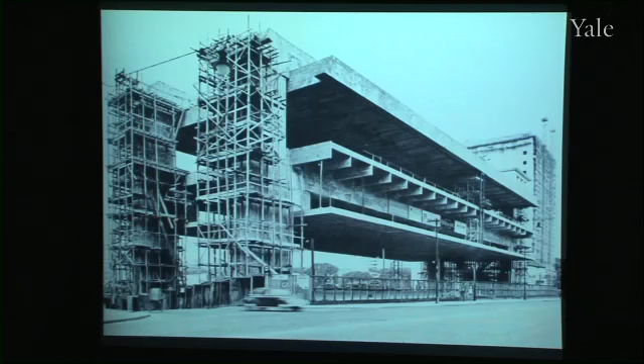But of course we're also interested in defying gravity, in stretching structure and pushing it to its limits. This image of the skeleton of the Lina Bo Bardi Museum of Contemporary Art in Sao Paulo represents this, where she made an 80-meter span, making the structure feel like it's hovering over the city, creating a belvedere, a public space beneath.

Or these bridges—the undercroft of this confluence of two bridges in Toulouse—which somehow describe the sense of presence produced by mass bearing down and being borne up, that ancient sense of moving amidst the play of the forces of gravity. And this drawing, which we love, from Italian Thoughts by the Smithsons, talks about conglomerate ordering and expresses so well the blurring of lines between landscape and building, between object and landscape.

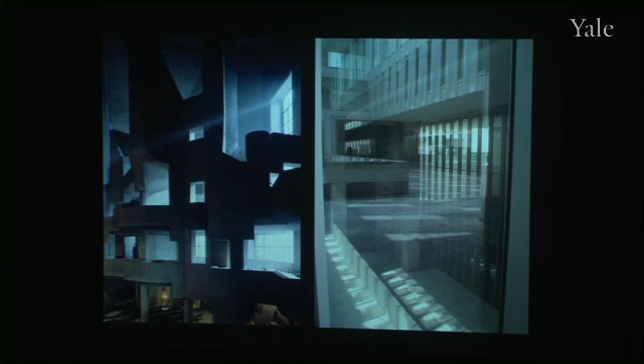We work a lot with surface and the making of layers of surface, always looking for a sense of depth rather than thinness.

In working in cities, this wall in Santiago de Compostela in the rain is an image we often think about. We think about Alvaro Siza's description of this wonderful wall, where he says it's a monotonous and vibrant wall, finishing the square, wavering between nothing and magnetic presence.

I suppose this represents a question we often ask: how much do we as architects need to do? Can we make a good wall? Can we make something mute but beautiful?

Sometimes we need to be in the background, and sometimes we need to make architecture that's in the foreground. Looking at cities, we think about the skin of cities, scale and rhythm.

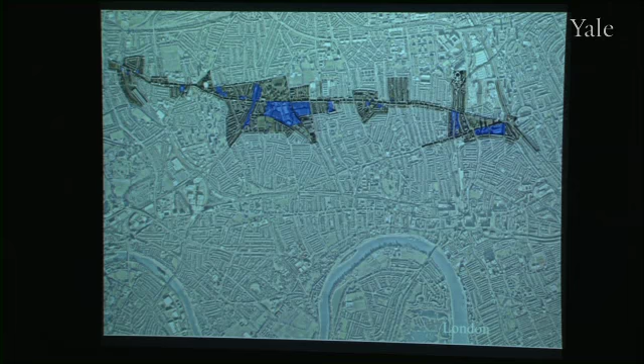These are four maps we made of London, Dublin, Milan, and Toulouse—each one an hour's walk in each of these four cities. These maps were really trying to understand the geography of these cities and the layers and grain of history one moves through in an hour's walk. Understanding a city is so much about measures, scales, rhythm, sound, and silence.

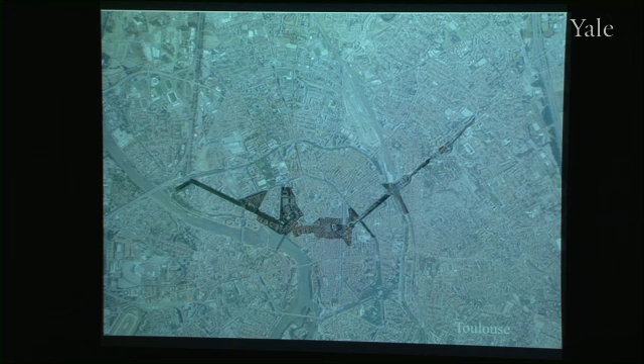Manuel de Solà-Morales talks about the skin of cities, and that we as architects need to give cities the attention of a detective who scrutinizes the tiniest clues in its wrinkles. That's something we enjoy thinking about.

Dublin is the city we've grown in, where we've had our practice for over 30 years. It's a city where we've been stitching and repairing large and small projects. The historic core of Dublin is very much related to the European tradition of streets and squares.

Because of this continuing practice we've been engaged in over the years—stitching and repairing—somehow that's ingrained in our consciousness, irrespective of the kind of problem or set of conditions we're given.

In this competition, which we won with a collaborative group, Group 91, to reinstate an urban quarter in Dublin, the project was very much about addition and not subtraction. That's probably part of our philosophy: to think more about what we can bring, what we can add, and how little—or if nothing—we need to subtract.

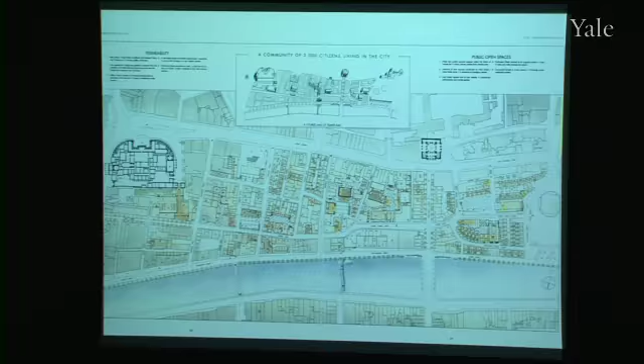We've also been involved in educational buildings at the scale of primary, secondary, and university buildings. This exploratory project aimed to provoke a discussion in the University of Dublin about the role of the humanities in the university. They used us as architects to provoke a debate about what the role of the humanities should be in the context of the role of the sciences, for instance.

And we made this space between a library and an arts building, and made a kind of free space within which anything could happen. We were interested in the idea of the view of the university as a place to which you go to look after and attend to knowledge. That a university is not necessarily about the consumption of knowledge, but that it's a collective endeavor of care where knowledge lives and hopefully flourishes. And so in a sense, we were thinking about a university as a kind of garden.

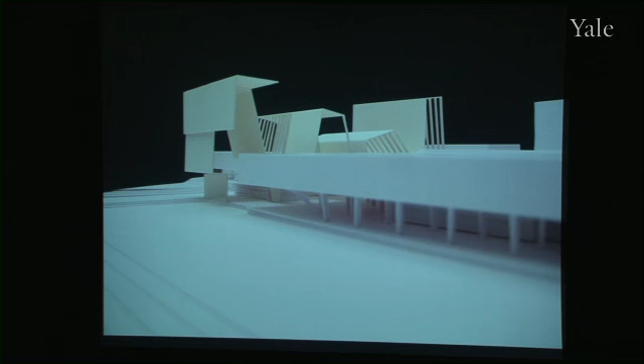And so we made this unreal exploratory project. We just made a series of canopies and light scoops to catch the sun, protect from the wind, and make a kind of space which might be a workspace or a place of public use.

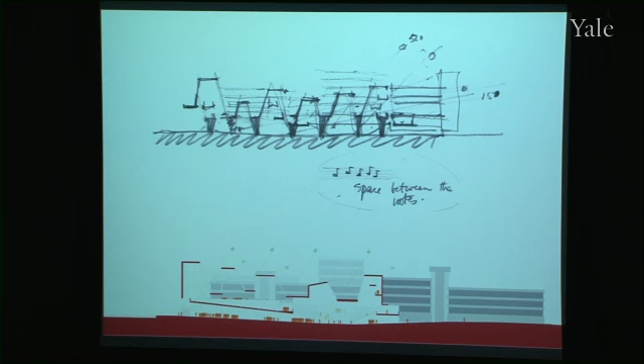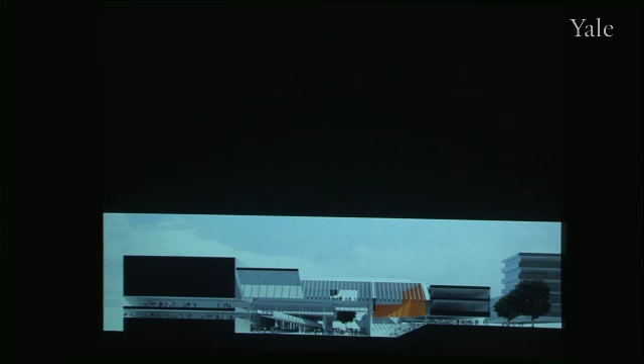And in contrast, we've also been working in a university building in the west of Ireland, in Limerick University, where we're making a medical school and student accommodation. We're not showing this evening, but what we are showing is a house that we did for the president of this university in Limerick. And we're operating here in a campus which is in the middle of the Irish landscape just outside the city of Limerick.

And this image shows the familiar ruined tower houses and castles which sit in the space of the Irish landscape like silent ghosts and actors from the past. And there's something really poignant about the way that these buildings sit hard in the landscape, not really enclosing much territory around them, but somehow sitting hard on the ground and having a sense of presence, both in terms of the immediate surroundings and in terms of the bigger horizon.

And we were working in the North Campus, where there's the loose agricultural field patterns in contrast with the more orthogonal grid of the original part of the university, which occupies the grounds of a classical estate house.

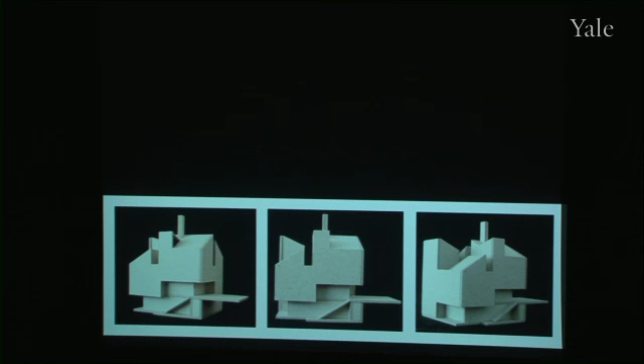And so we were working with the more, let's say, primal Irish tradition of these towers and ruins, and trying to stake out territory in a way which in some way was evocative of these kinds of buildings, carving and sculpting the house to make a sense of vertical stratification, and as I say, to finding a way of sitting the house in the landscape which would be reminiscent of these buildings.

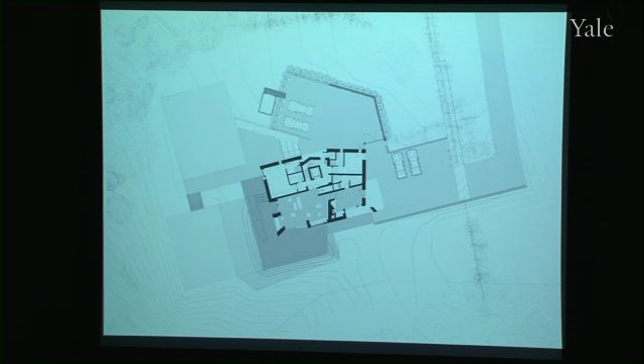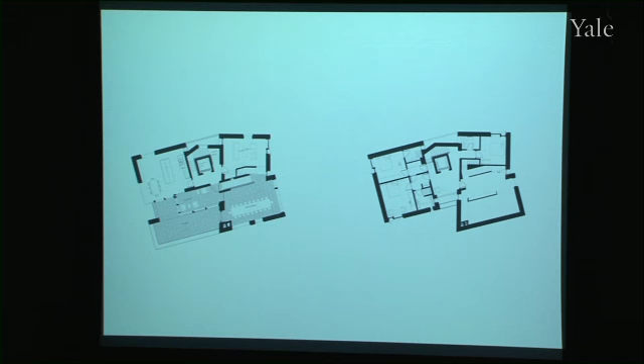It's a 3-story house, very simple, modest kind of project in many ways, family quarters to the north, and the more public functions facing the south over the River Shannon. A loose form which somehow adjusts itself to the surroundings.

And somehow making windows and deep walls which engage with the landscape, both in terms of its immediacy and its bigger horizon, and using traditional techniques of building of lime render, limestone sills, and timber windows, organic materials which adjust and change with the climate.

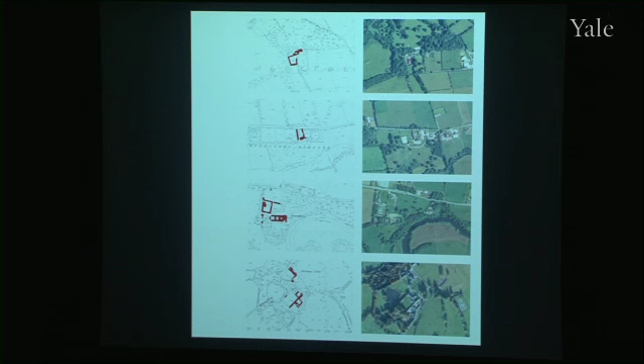And probably in contrast with the more stoic or heroic presence of these towers and castles in Ireland is the tradition of a much more modest way of occupying ground and occupying landscape, where farm buildings and more modest housing somehow merge with the hedgerows and the field patterns and hug the ground for shelter.

And that tradition is one that we've used in the making of schools, where we hug the ground also for shelter and stitch into existing copses of trees and make courtyards for protection and make foreground or entrance spaces which frame the sky and frame the bigger horizon.

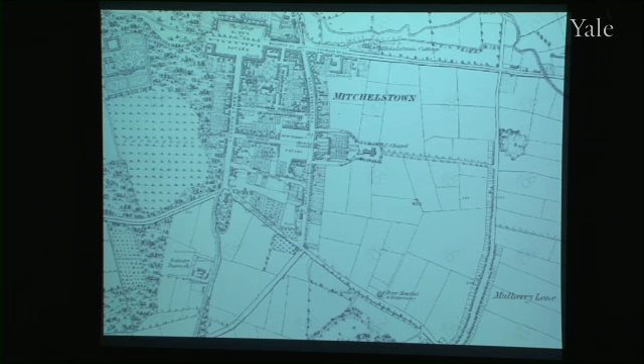And this small project is a little conference centre, exploratory project, again a competition for a group of doctors, again in County Cork, on the edge of a market town, a one street more or less kind of market town.

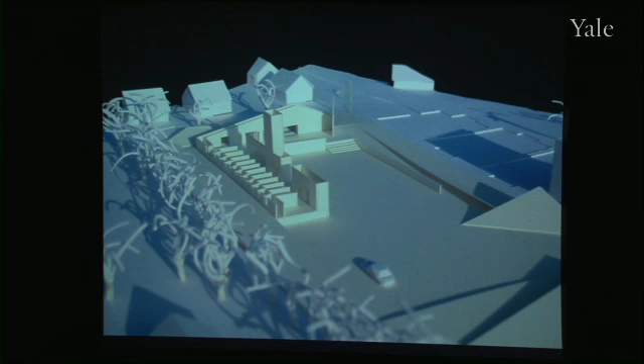These doctors wanted to make a building which in some way would allow them to come together as a collective practice, setting up a new model for the practice of medicine in Ireland. We were using this modest way of occupying ground, using walls, berms, and hedgerows to make the immediate territory of the building to protect from wind, and using traditional elements like the hearth as a kind of anchor to make a center to the collaborative exchange that would happen within this building.

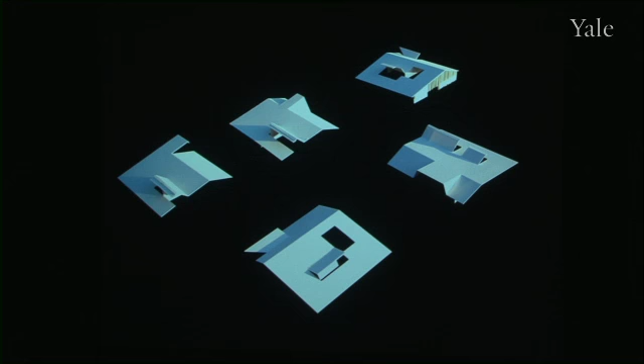And again, working the roof in terms of how one would make a collaborative space, a large-scale kind of workshop. I suppose it's a theme that we work with quite a bit, this thing of working ground and working roof and making that space in between the two.

In this project, at a very simple level, the idea was that it would be a temporary building, that it would be cheap, that it would be prototypical, and that it would be exemplary. We looked at how we could make a building sit lightly on the ground with no foundations, using marl floor and hempcrete.

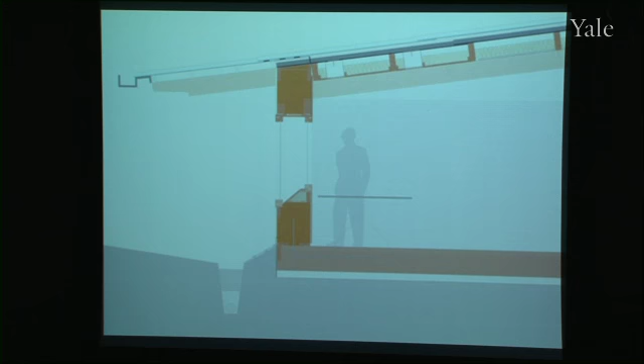Cement-free walls. So again, I suppose it's somehow trying to refresh a tradition which we respect, using small-scale building components which could be lifted by two men to make the roofscape.

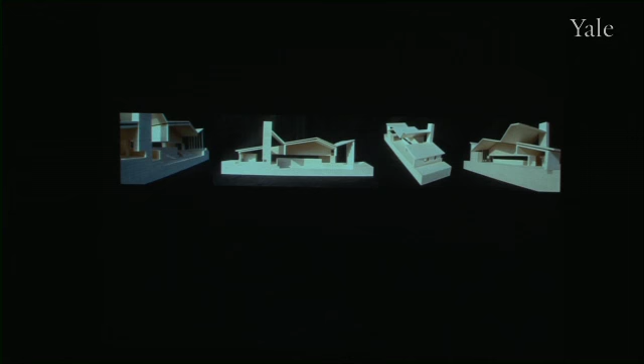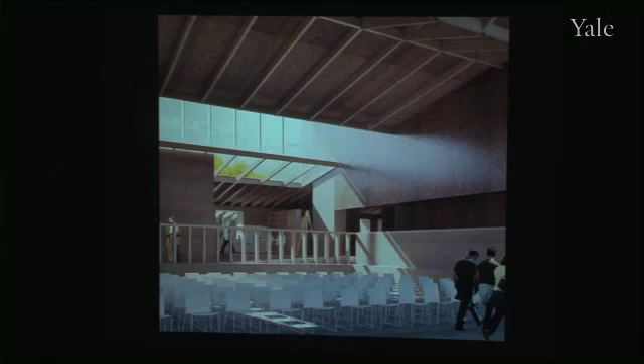In a way, this project was questioning and dealing with the economic problems in Ireland, the fact that the construction industry has changed completely, and that new models need to be developed in terms of how one makes buildings more in terms of small-scale groupings being able to operate in a much more relaxed way to make exemplary projects. And combine low technology with common sense in terms of making a building which would have a rudimentary feel, but in a sense would make the kind of workshop space that these people were looking for, in terms of making a space of collaboration and experimentation of new ideas for them.

So this building hovers somewhere between the kind of industrial shed and the workshop. We used this as something to build on in a recent competition we did for a small art centre in Tullamore in the Midlands.

This building occupies the frontage of the canal, which was once an industrial thoroughfare. We took many of the ideas of the previous projects to try to develop a very economical way of making an art centre which would be a place of work, a place of exhibition, a place of theatre, but most of all a place of joy and pleasure which would draw a community together.

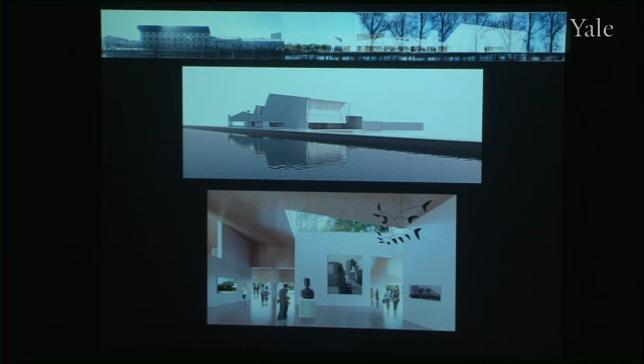The Nobel Prize-winning Mexican poet Octavio Paz, in his Uses of Traditions essay for the Luis Barragán book, says, and I quote, 'To be truly modern, we must first come to terms with our tradition.'

As we have said this evening, we have been building for 30 years or so in Dublin, and this aerial view of Dublin shows the parks as rooms, public spaces, where you are more conscious of the void and less conscious of the object. The 18th century grain and rhythm form type of cliff walls.

They have repetition, not sameness. They have richness, not complexity. In our studies, 50 to 70% of these walls are solid. If you note the chimneys, what's amazing about them as part of the streetscape is that the chimney pots express the individual rooms within that and form part of the tiny air shafts into these individual spaces.

Traditionally, in Dublin, special buildings are made out of stone, ordinary buildings are made out of brick. When we made our Department of Finance, we decided to use limestone. Beside this building project that we did is a pocket park, which is a Huguenot cemetery.

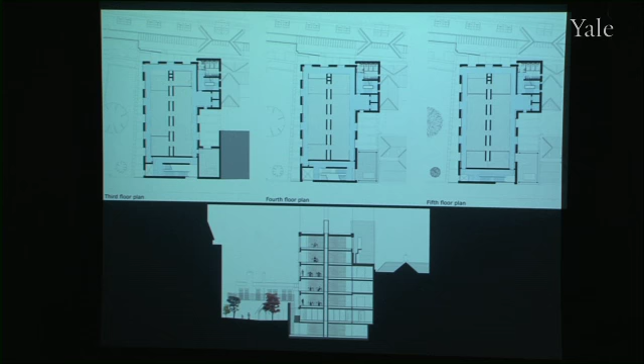Our project touches 70 feet of a city street. We made a simple rectangular plan which allows the sun to penetrate all the elevations and allows a 360-degree view of Dublin from within. The building is set in the context of the city with the tonnage of limestone, cantilevering 3 meters, 9 foot, forming part of the new geography of Dublin.

We used a pale grey limestone with a sanded finish. We also used a dark grey Kilkenny limestone, and we burnt the surface of the limestone, releasing the underlayers. We brought American bronze across the Atlantic to form a screen into the threshold.

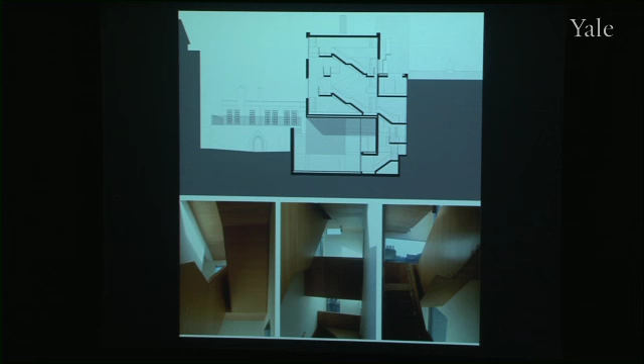Essentially, the project is about offices, but what we did was take the only main possible space for us, the staircase, and made a 4-story main room, a 4-story space hovering over the city. We made the awareness of where you are, the place that anchors you, as part of your movement up through the staircase, reminding you, especially the civil servants who work within the building, that the relationship of their work and their intensity is to the city of Dublin.

Sorry, let me just go back.

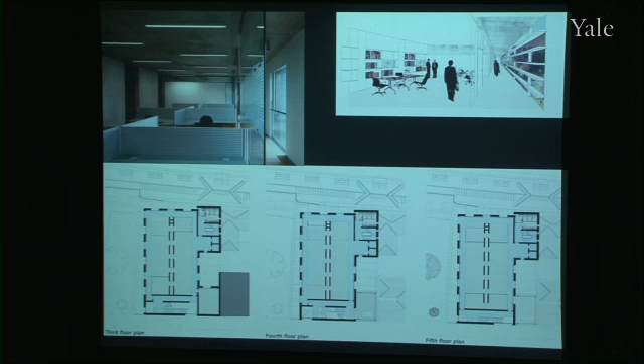The cloister: what we did in this particular part of the Department of Finance was to organize the circulation to the edge, forming a type of cloister, with perimeter circulation wrapping the city around the edge of the building. It meant each worker had a deep framed view, remembering that you're part of the city.

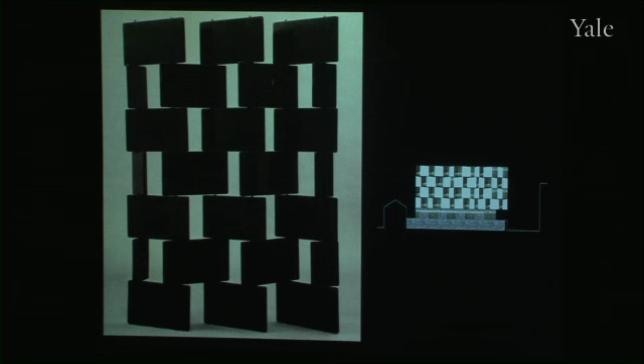We love this lacquered screen by the architect Gray, interpreting the solid and void. When studying the elevations of the project, we used this as a type of touchstone. We were also fascinated by this amazing project in Stockholm by Peter Celsing, where he used these elemental stone walls. So we made a deep stone and glass screen, a vertical weave of stone and glass, where a person can stand into the depth of the wall and experience its depth.

This is an image of two cities, Milan on the right-hand side and Dublin. Dublin shows a city surrounded with the infrastructure of canals. We're also fascinated by the issue of time - something built 300 years ago as a means of transport to connect parts of the country has now become a place of pleasure.

When we were invited to be part of a competition in the city of Milan, we were struck by Lewis Mumford's words in his book The City in History. He talks about a friar, Bonvesin, in a book written in 1288, who reported in the Marvels of the City of Milan that there were already, back in the 13th century, 200,000 people in that city and its dependent area - all the figures support a description of a gigantic urban formation that had already, in its exuberance, passed beyond its medieval scale.

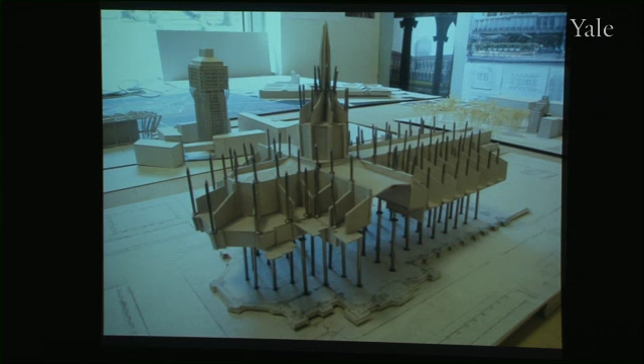For us, when we began looking at the city again, we looked at these finds and were reminded of how wonderful and powerful the Galleria is as a rediscovered treasure in Milan, or the roof of the Duomo, that stone man-made mountain in the middle of the city. This is a terrific interpretive model made by one of our students at the Accademia in Mendrisio, showing this kind of hovering stone island in the middle of Milan.

We also love Milan because it has a city floor carpeted by stone, surrounded by a city of wonderful stone. This is one we discovered to our great delight, a stone called Ceppo. The marvelous thing about Ceppo is that when it's used on buildings, it's used with absolutely the tiniest joint, so it merges to become a continuous surface.

It's also a city layered with privacy - restrained, with secret interior worlds. This is an image of a fantastic medieval building in the center, just near the Duomo, called Il Broletto. What we loved about this building was its continuous and repeated structure, but also that it was a place of exchange. When studying the competition brief, we also felt there was a component in a university that is also a place of exchange of ideas.

So in 2001, we were one of 10 firms invited to participate in this competition in Milan. We came to the city with sketches in our pockets, looking for a strategy and a grain that would be appropriate. The site is embedded just outside the Spanish walls, part of the Bocconi University.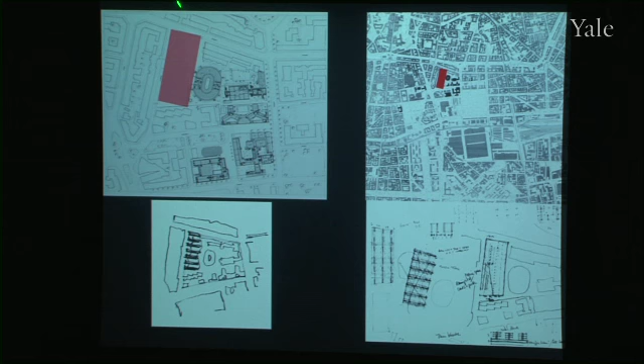The site here, outlined in red, on a noisy trammed street, moving into the open weave of the university complex. We looked at spaces below ground, because in the competition they asked for 50% of the accommodation to be below ground, which was the conference facilities, and the other percentage above ground. We looked at spaces below ground, like the beautiful Salk Institute and the sunken churches in Ethiopia.

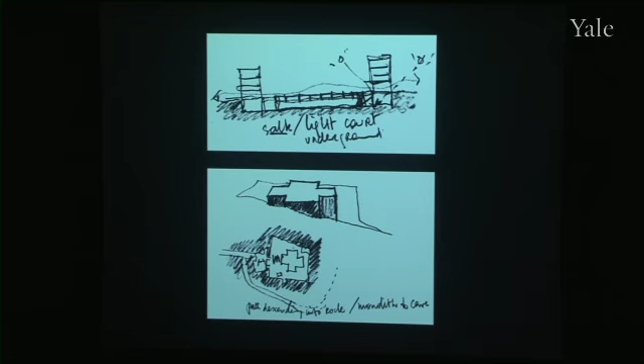The brief required offices for 1,000 professors and facilities for another 2,000 people, which would be in conference facilities below ground. Our strategy was to hold these two worlds apart, to let the space of the city enter in between. In this interpretation, we raised the offices above a carved ground floor beneath.

The master architect and teacher Alejandro de la Sota, in one of his seemingly absurd maxims, says about architecture, and I quote, that it is about achieving as much nothing as possible. As architects, we understand this nothing to mean the space between city and street, between inside and outside, between ground and sky—the space where light and air and volume are held. It's the space in which we stand as human beings.

Materials, on the other hand, are the opposite to nothing. We are interested in making something out of nothing. We are interested in space, volume, and place. We are interested in transparency, which is layers of nothing, illusion, and effect.

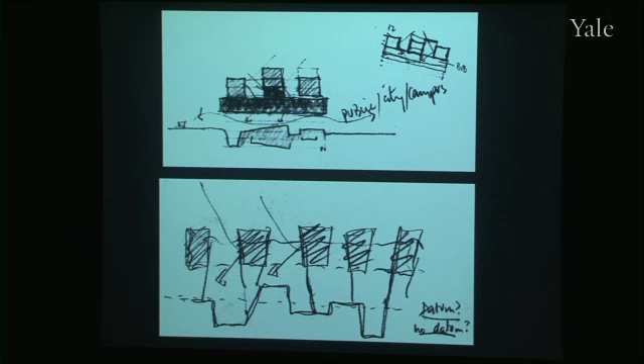So we begin our struggle to interpret the project within the structure of Milan and within the organization of the building. Fascinated by the surfaces of the city, we bring a stone carpet right through the project, which moves into the campus. We place the main auditorium on the cusp between the university and the main thoroughfare of the city.

We delay the entrance to the central point. You arrive and drop down 5 meters, that's 15 feet below street level, or you move through as a student, or you rise up at the particular point where the 1,000 professors arrive and move vertically from their position. We also make a small street connection into the campus, and bring students down to the lower level in the plan.

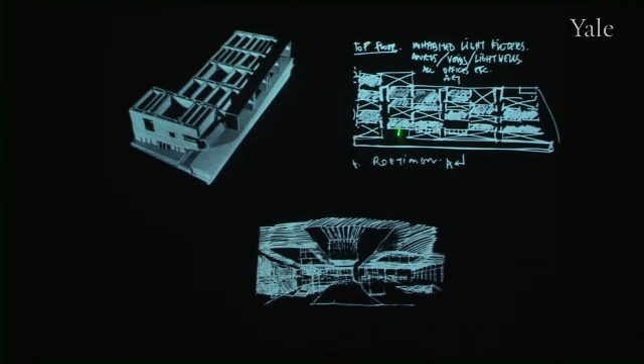Here the sketch looks at the soffits of the building, undulating and carving, bringing the space of the city down below. The next important issue for us was how to find a structure that would support that architectural idea of separating the ground and the hovering offices above.

This section drawing is really an important moment in our design, where we actually position the structure at roof level and hang the offices from here. In this section you have the structure positioned at the roof level, these arrows representing the office layers which are hung from above, and that liberates the space between the city moving through and the carving into the earth at this point.

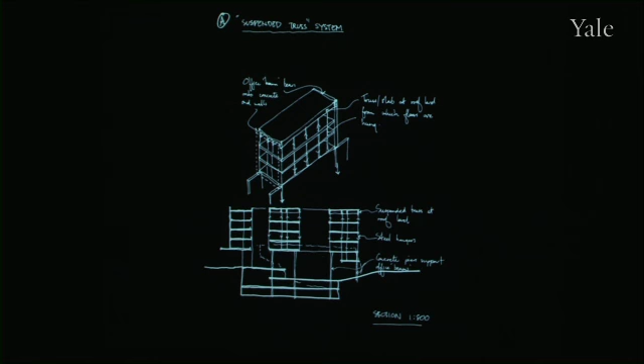Just in terms of the plan of the competition, the offices are sometimes double-loaded corridors, sometimes single-loaded, the X's with the carving space allowing light below, and the long section showing the Aula Magna, the large space.

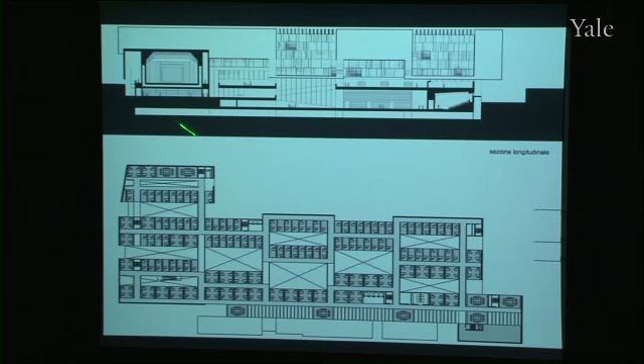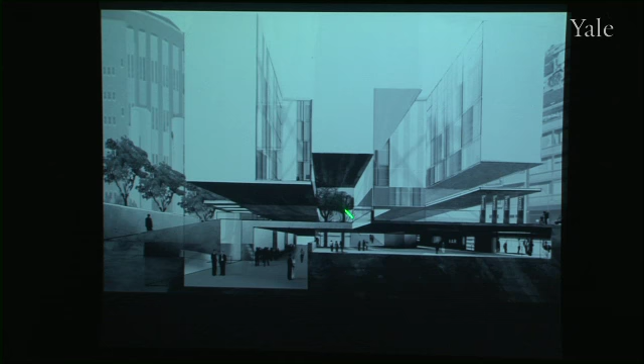Set to the city: the short section, and this three-dimensional perspective, visualizing the relationship between the city as you move across the plan to connect students ramping down the 5 meters, the 9 meters down to the lower level, the offices being hung above, and their soffits forming that space, that in-between space.

The issue then of representation, or finding a language within Milan. Close to our site is this fantastic project by the architect Moretti. What for us was really important was the strength of expression in this project, in terms of Moretti's form protruding like a great snout, and for us this carving of the section and finding a way of overlapping the expression of the offices.

And the type of periscope relationship with the Aula Magna, that it would reach up from being buried deep into the city, but also lift its ventilation shafts into the city form.

This is a misty, foggy day in Milan that has no river. It sometimes has this incredible atmosphere. You don't know exactly what time of day it is. This is a kind of nondescript corner, the site for the competition.

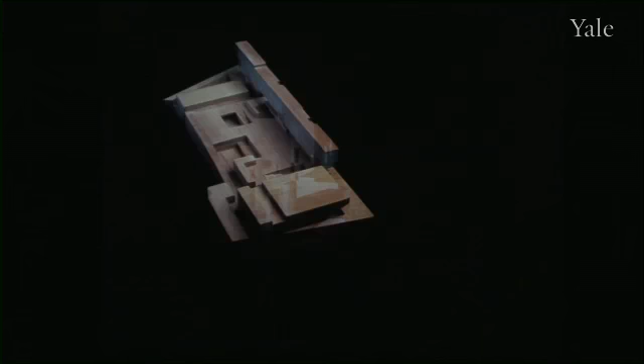This is setting our project in a pencil drawing into the location, a night view, viewing this lantern position of the Aula Magna relative to the city. This is a model at 1:500 scale.

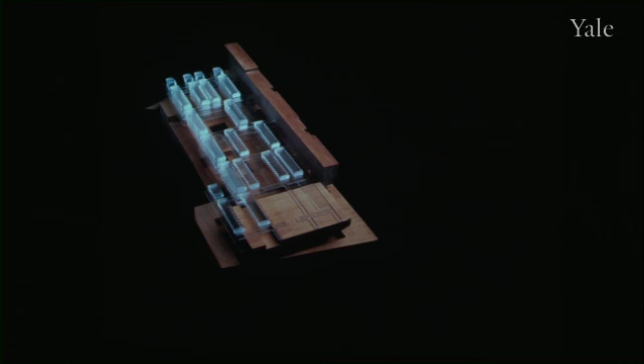We're pushing and pulling and carving into the earth to allow that connection down to the ground, using the Aula Magna like a type of boulder on the corner, and using the library as a type of crust or shield to the edges of the site, building up the little bars of offices to form these deep courts, shading and allowing controlled light to enter below.

For us, the interesting thing about this space is the 66-foot cantilever of the Aula Magna. It's in two parts, for 600 people and 400 people. The street, the city level, is at this point. There's 5 meters below, 15 feet below, which is the entrance for the Aula Magna.

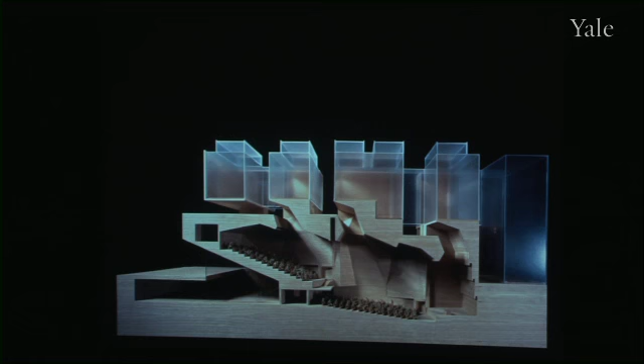So we were very lucky. We won this competition, and we began, obviously, making the drawings and the tendering to begin to make the project, and talk about architecture as the new geography.

It is incredible to carve into a city floor, to go down below the water table level, to begin this mammoth task of actually carving the project into the surfaces of the city. So at this point, we are down below water table level, beginning the structure of the building below.

For us the issue, this on the left-hand side is a photograph of the limestone in the Burren in the west of Ireland. What's amazing about the Burren is that the limestone over eons of time has been carved and cut by the process of its relationship to water and carbonic acid forming with this combination.

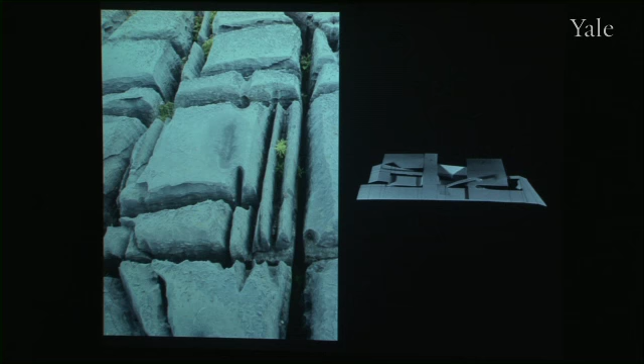When we were doing the competition, this modest paper card model is really trying to describe that relationship of carving and pushing and pulling, that intermediate world between sky and ground.

We just wanted to share with you this evening this fantastic image for us of a granite boulder tossed by the Atlantic Ocean, all its corners rubbed off because it's thrown and pushed and pulled, so nothing remains except the circle, embedded, thrown by the sea onto this limestone.

It's something that I suppose we'll be discussing with our students over the next number of weeks this semester, this issue of time and material and the relationship between the characteristics, the physics of materiality within architecture.

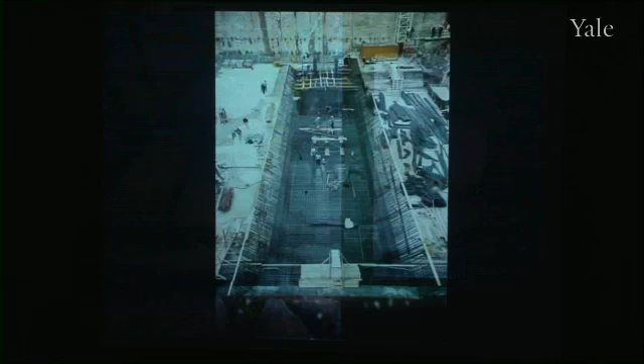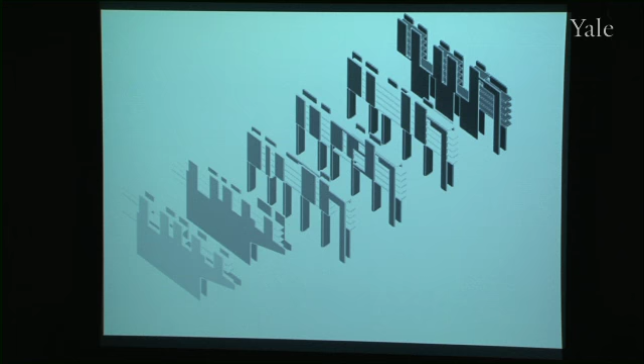So we began digging into the Milanese earth, the great feet of the structure below, and we have the 75-foot apart diaphragm walls with 11-foot twin spaces which form these corridors. So the structure marches south down over the site.

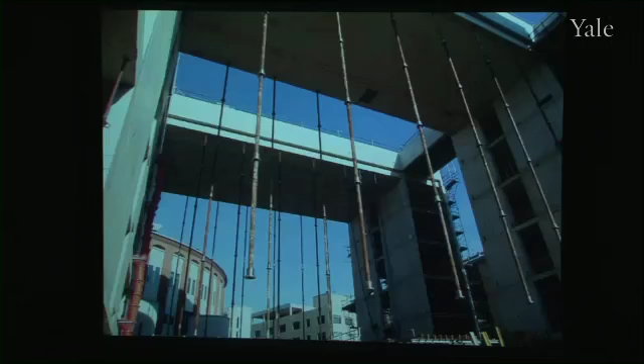This becomes this amazing, for us, setting up of the measure, forming a type of social infrastructure. The roof beams are positioned high up on the structure from which the offices are hung, with the metal waiting to receive the office as laid in.

For us, I suppose, architecture is the art of structuring space. For us, structuring space is a process of defining limits and liberating boundaries.

When we show this image of the scaffolding for the support of the weight of the cantilever that's going to come, what fascinates us is the idea of translating an idea into fact, but also translating the weight of wet concrete which will rest on this supporting surface, which will cure, which will become hard, and will become the cantilever.

So here is the drying concrete, which forms the relationship with the city.

Bocconi, then, when we chose the Ceppo stone for the building, the university bought the Ceppo quarry, which for us was fantastic because they actually bought the mountain. And when we went there, we were shocked because the sloping surface of the mountain was incredibly like the proposal we had for the Aula Magna. It was like there was a one-to-one model of the project north in the mountains.

What was also amazing for us was the carving—I don't know what it's like here in the United States, but the way they carve in Italian quarries is that they quarry deep into the mountain. They cut 27 foot by 27 foot by 27 foot cubes, and they make these incredible cathedral spaces within which you can penetrate, but also have fantastic ventilation and light, cathedral-like spaces.

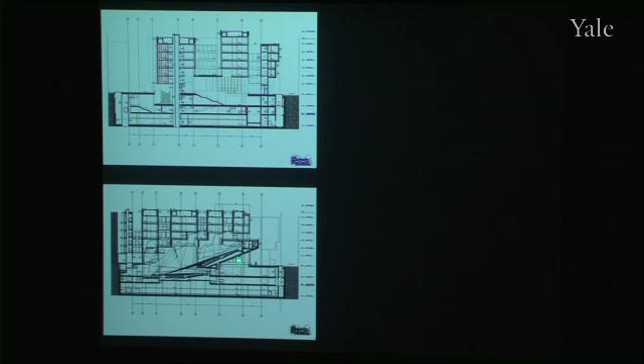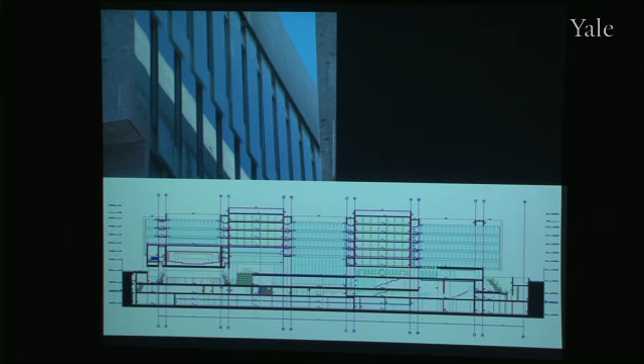This is the 22-meter cantilever hovering over the city. We did the long section where each of the offices for the professors has a glass screen which represents their individuality. These are the pencil drawings during the competition describing the internal world of the glass for the offices and the crust for the external relationship to the city.

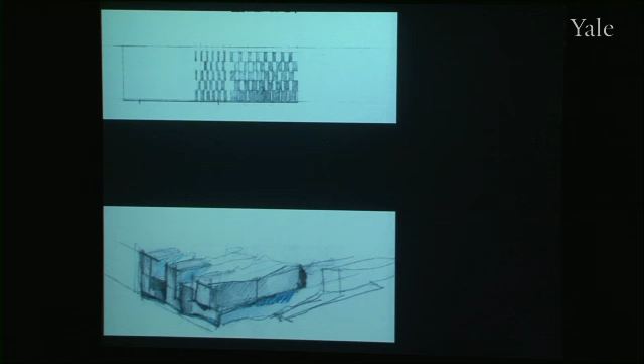You're looking up here at the crystal shards of the lapping glass. This is the Ceppo, the outer crust of the building.

Then the building becomes embedded quietly into the city context, becoming, as we say, part of the new geography of Milan. We made stone cliffs, we made transparent boundaries, we carved deep caves, and quoting Kahn, like the light in the Pantheon where you can feel the cut, we arrive under the suspended structure.

We ramp down deep into the earth. We have staircases which lead up to the sky. We have places of public gathering. We have a 75-meter structure.

I mean, this is the consequence of the 75-meter structure - 75 feet structure. 75 meters would have been better.

We have the street level, which is here. We have the minus 5, the 15 feet below, and then 9 meters below, which is 27 feet below ground level. So you get this social interaction, which for us was a fantastic consequence of the structure.

We also have this issue of interconnecting transparency and light. You can feel the force of gravity, the diagonal cut.

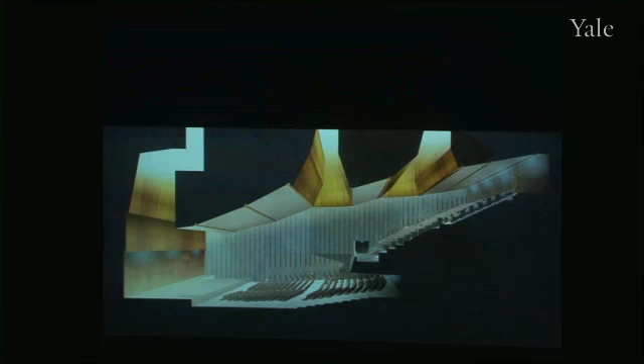The interior then becomes - it was once described very beautifully for us like an oyster shell. The interior of what we call the Boulder, or the interior of the aula, has 3 light scoops, and it's the only, if you like, interior cocoon space in the project.

We lined this with the Pietra Siena stone. And what's interesting for us, this is a model we made, which is in reality a scale of 1:200, where you see the 600 and the 400 and the 600 seat spaces.

Cut in contours. And when we go back to the quarry in the mountains, what's interesting is that you see these kind of shards of cut in our one-to-one model, if you like, in the northern hills.

The hall for the 1,000 people has natural daylight. And the interesting thing for us architecturally is that this space underneath the aula has a primal sense.

You're looking at it on a wet night, like last night here in New Haven. You have the wet, you're standing on street level, you're looking into the space, and there's something about this space that makes people want to dance.

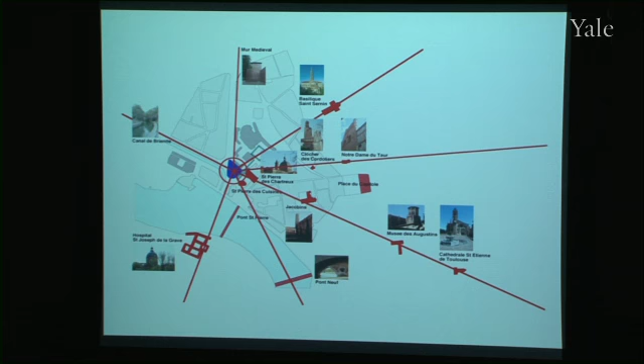This sketch describes the starting point, or the searching for the idea, that while in Milan we buried all the conference rooms, in Toulouse we felt a need to bring all the public rooms up high in the space to be able to view the city. So this sketch expresses that in the background would be the research offices of the professors, and through this kind of monumental wall we could make windows to the city.

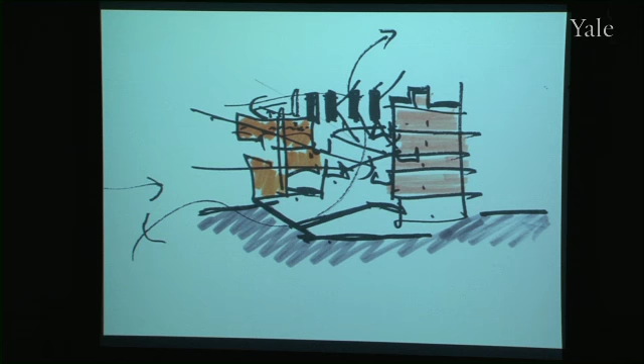These sketches describe what we try to talk to students about today and always: that at the beginning of a project, your search is a combination of precision and randomness. It's a combination of not knowing what to do and having some idea of what you want to do, and it's a combination of the rational and the emotional.

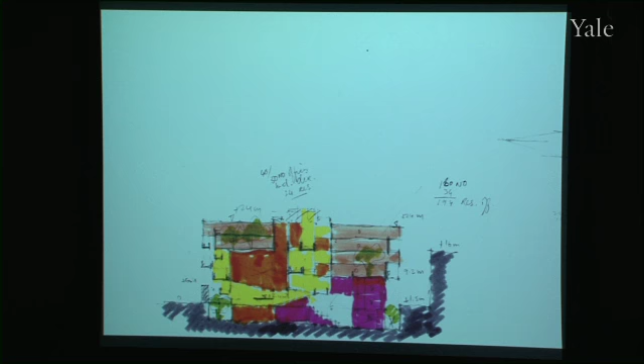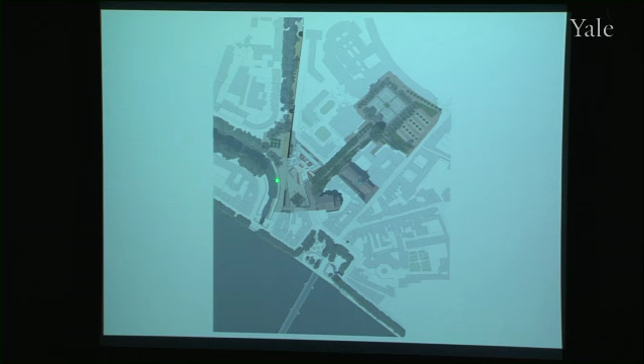These sketches describe again this thing of trying to see how the orange, which are the public rooms, could be located in a way where the more background spaces could engage with these rooms, but could somehow view past these rooms to the world of the city beyond. So our site is in this pivotal space, a point where the university site reaches down and occupies this prow, where the branch of the Midi Canal connects with the Garonne River.

In a sense, the geometry of the site and the nature of the city meant that we made this kind of collage of the elements we found in the city—buttress walls, which are in fact fire escape stairs, sky cloisters, colonnades, and courtyards—and we could also deal with the climate of Toulouse, making spaces protected from wind and rain but still external.

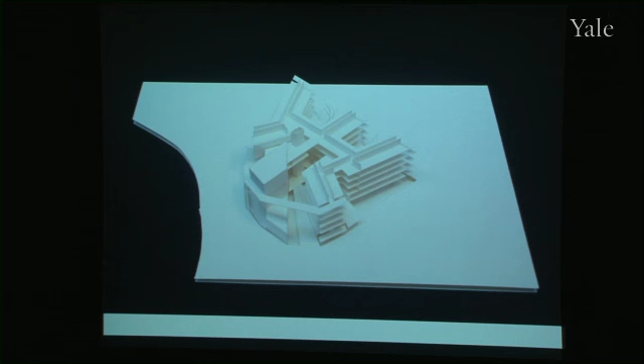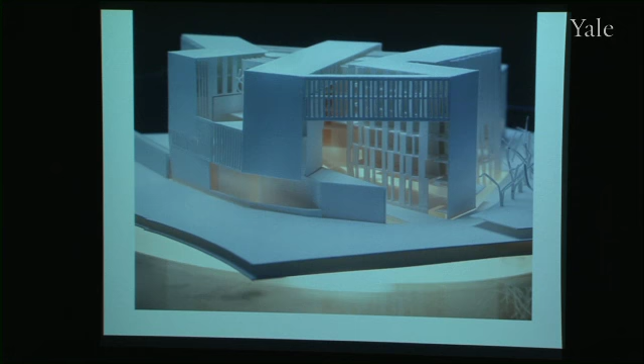So we made the public room of the university a central courtyard. It's actually the foyer and entrance hall, but it's outside, even though protected from wind and rain. The building kind of inhales and exhales, allowing the world of the city to spiral around its edges. We're always trying to make choreographed, framed views of the city beyond, whether from terraces, internal rooms, or conference rooms.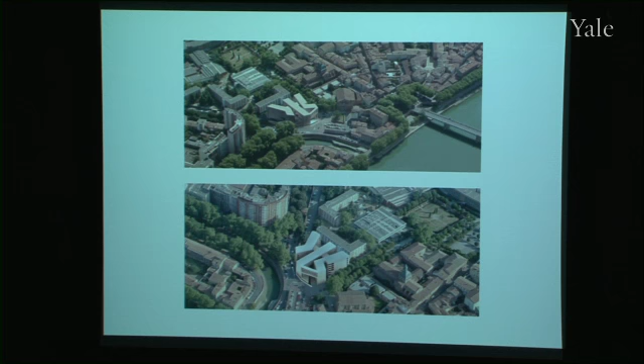Then looking at the scale of the building at this edge where the medieval, old city finishes and the new city begins—we're on the site of an existing medieval wall, in the company of a beautiful Romanesque church, and adjacent to a very active public square.

In this image at night, we see the buttress of the Romanesque church and the forecourt to our building, where we've made an element we call the sky cloister, which was to do with making a promenade from the president's office across to the conference rooms.

Within the building, there's a whole way of circulating externally as well as internally. The introductory space is a forecourt space which frames the sky, in the way that many of the courtyards in Toulouse frame the sky.

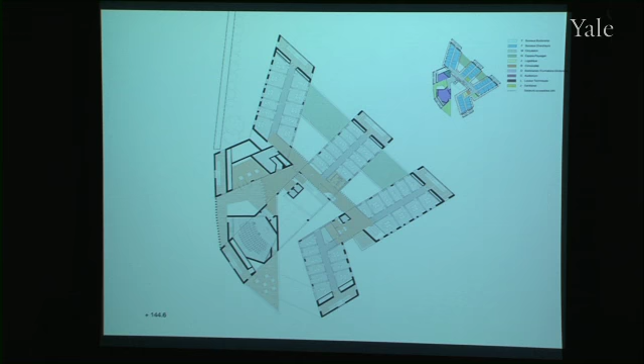This main ramp takes you into the heart of the building, which is protected from wind and rain but is actually an external space. Again, this comes from spaces we visited in Toulouse, where you get these grand staircases, but they're gated, not internal. There's something lovely about the way the wind moves through these spaces in summertime, and yet they're usable and protected in wintertime.

So just looking at the layers and strata and the building up of this section to make, I suppose, what is the social heart of this university, which is protected from the elements but somehow always relates to the city beyond.

This is what we call the window between one conference room and the other, and these terraces and bridges somehow occupy the space of these deep window reveals.

Because we used the brick edges as fire escape stairs, we were able to deal with that issue of safety and escape, and so all the public circulation is very open and very free.

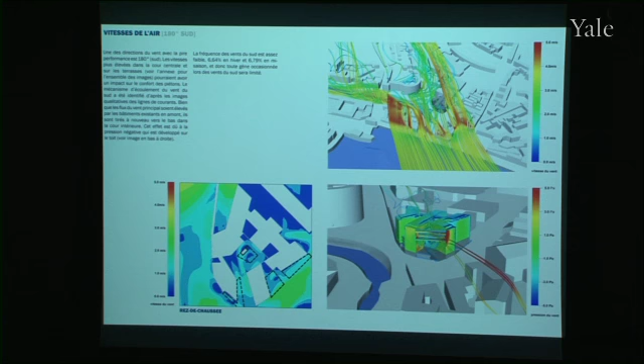These were studies we had to do to prove to the client and to the authorities that external, internal spaces would work in terms of wind and in terms of control of climate.

All of the elevations of this building are mapped and worked in terms of light and shade, in terms of solid-to-void ratio, and in terms of dealing with the climate.

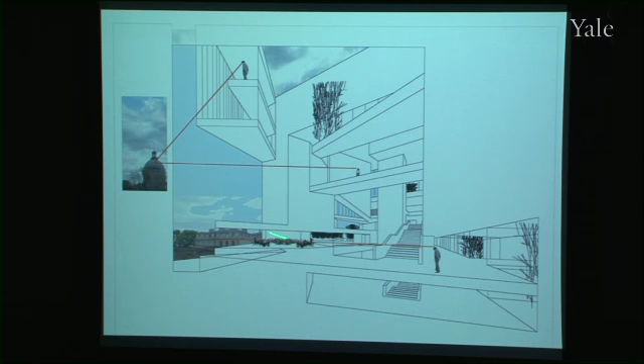I suppose this sketch just shows this sense of making an internal landscape and this wish to choreograph the connections to the various landmarks in the city beyond.

Again, the section which shows the sky cloister and the entrance to the building, and this merging and blurring of boundaries between spaces which are internal and spaces which are external.

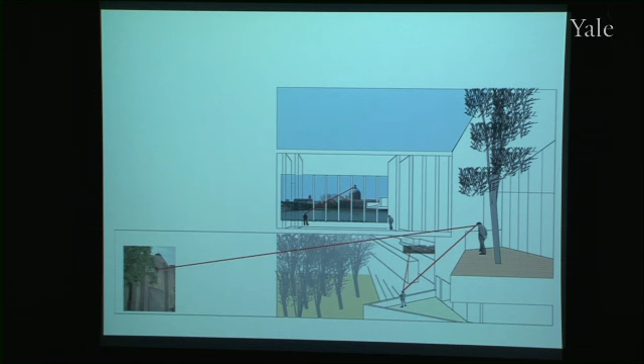I suppose we do think about the landscape of the city becoming the interior landscape of the world of the university within. This gentle ramp takes you up to the entrance foyer, with bridges and terraces overlooking this space—the social heart of the building.

Looking at the technology of making this building in brick and how we work, thinking both from the very particular detail of how we make a building in terms of the actual material we're using, but also how the building sits in the landscape of the city.

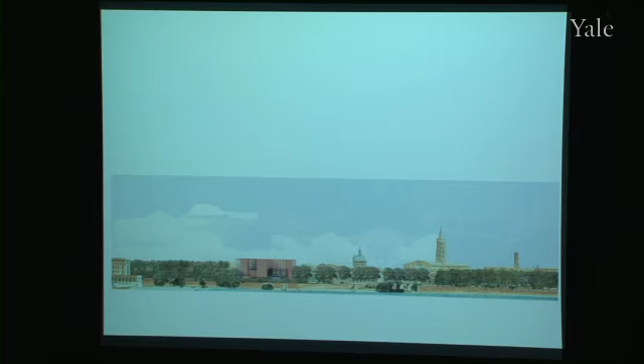So we're continually moving between scales, thinking at both scales concurrently. We feel this is important for us in the way we work, to get a sense of connectivity in terms of the language of making, as well as the overall language of form in the city.

We discovered, just outside Toulouse, this amazing brick factory where they tell us they make bricks in exactly the same way as the Romans did, using the same size molds and the same size brick.

And it was like a bakery, a brick bakery where you could get hollow bricks, round bricks, square bricks, whatever brick you wanted. It was just an amazing kind of place. So we'll be using this ancient material in a contemporary way in this building in Toulouse.

But also, I suppose, in terms of a quote by Laurent Beaudouin, who was one of the competitors for the Bocconi project. In a text where he talks about the architecture of Sverre Fehn, he uses a beautiful term where he says architecture is a machine for slowing time down. And in our current world, that seems like a challenging idea.

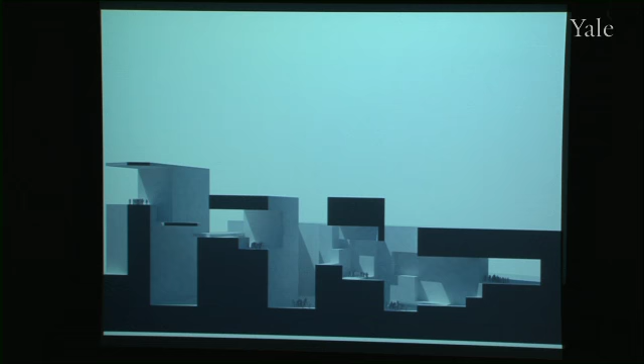So we thought about making this new piece of city, which is about 50,000 square meters, by thinking about it as a new piece of geography, by making what is a single-use brief, which is symptomatic of our time, that somehow we're asked to make a piece of city of this scale with only one use, with no rich mix of a variety of uses. So we had to find the space that was missing, the component of the project which was missing, which is effectively the making of a public space that would bring the workers within this building together.

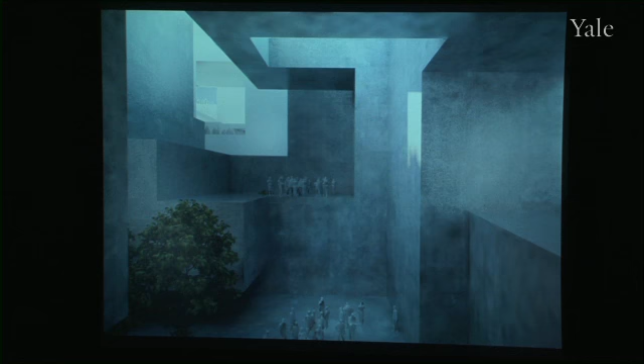So we thought about carving the block in terms of taking south light deep into the block, and used the Chillida image as a kind of starting point, thinking about how the carving of the track of the sunlight in this block would make the public space, which would somehow make a space where people would feel like coming together.

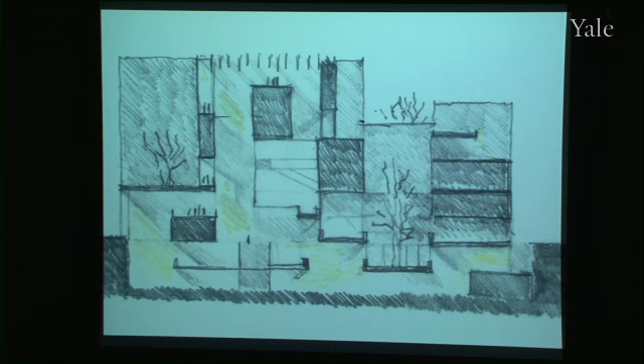And that we would make a series of trapped landscapes and gardens which would connect these blocks, and that would somehow tell the worker the time of day and the season - simple things that we need as architects to think about. How can we make places of work pleasurable, where people are continually aware of weather, of time of day, of the seasons?

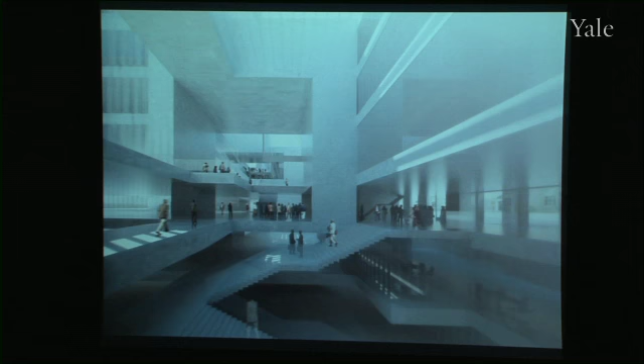And we mapped this carving of the block scientifically in terms of taking south light deep into an east-west block, and how that might make a place where people might want to come.

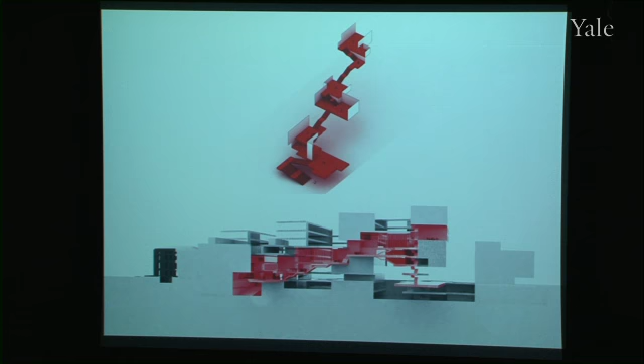And the staircase, I suppose, is a continuing preoccupation of ours, and how the staircase is such a natural place of gathering. When one thinks of the classic hill town, how important the staircase is. And so these study models were for us in making this new project.

Our cities are sometimes a collection of dislocated elements, truncated episodes, heaps of objects lacking visual coherence or apparent meaning. We have to engage in the structuring of spaces, not in the abstract mode of master planning systems and networks, but in the construction of a new geography with a human dimension. Thank you.

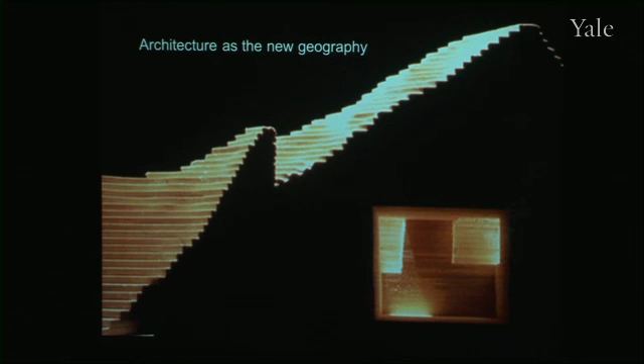Thank you for a very beautiful talk. I think everyone is probably slightly in awe of your command of language, both built and verbal. So we appreciate that very much. And I'm sure there are some questions in the audience for you. I hope there are.